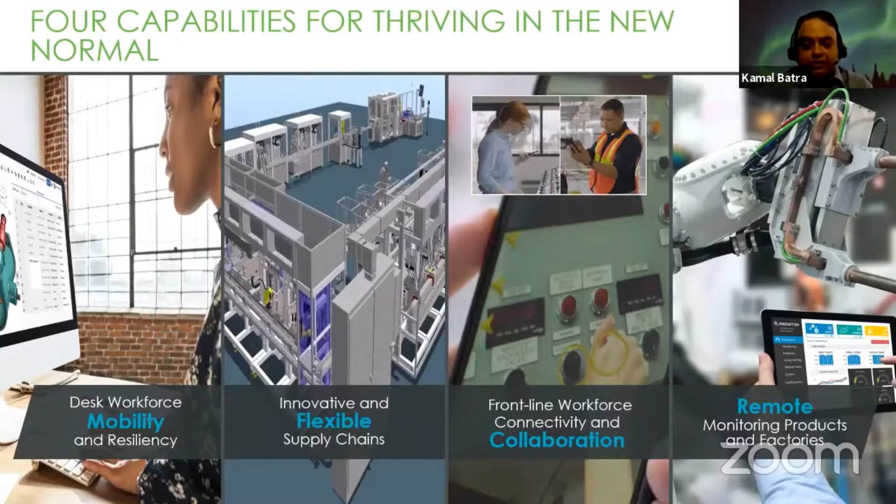Time to transform is now. So what do we need to do? We already have physical infrastructure. Let's bring digital into the picture, merge them like yin and yang, and make sure we get digital transformation, which is the means by which industrial companies capitalize on physical digital convergence. They already have physical infrastructure in place. They need to put the right digital infrastructure in place, and no one is positioned better than academic institutions right now to recommend to industry, to train the students, build that talent so that industries can adopt the right technologies at the right time, at the right pace, and still maintain their business continuity. That's very essential in the given new normal, I would say.

So how will that happen? Physical digital convergence will happen on people, products, processes, and places. How?

On the people front, increased workforce mobility and collaboration. On products, products will always be differentiated on whether they can be remotely optimized and managed. A product will be looked at as an asset, and any equipment should be able to be monitored or managed remotely as well.

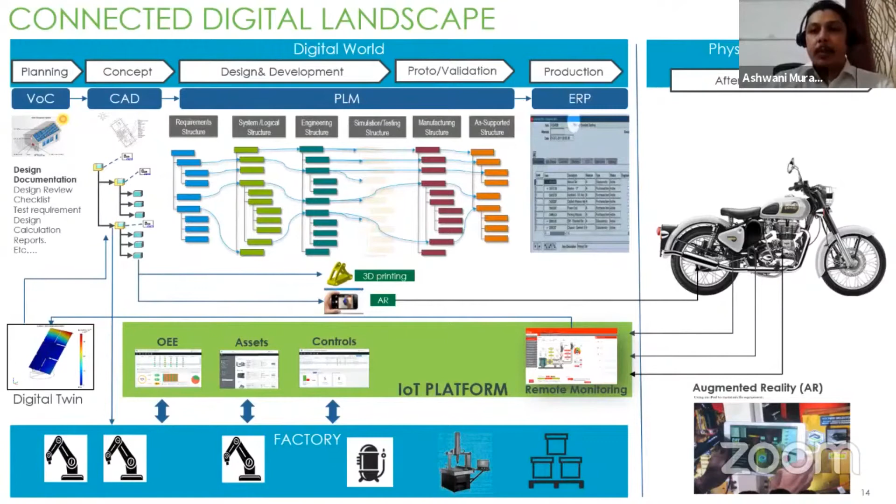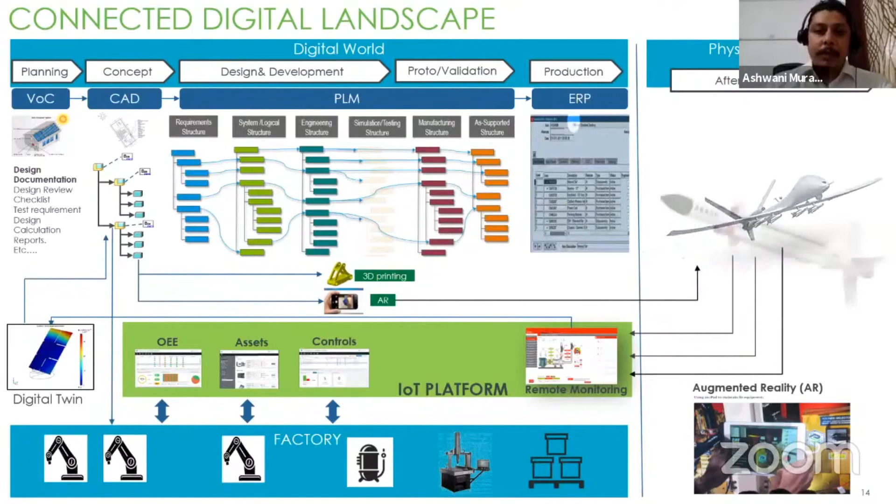We also have digital twin, where, let's say, our vehicle is moving or our machine is working in the lab, and at any point we can see how the parts are moving in our software interface as well. On the right side is the physical world - it can be two-wheeler, four-wheeler industry, aerospace industry, or shipyard industry. The processes across all industries or segments are the same, the industry can change, but that's how it works.

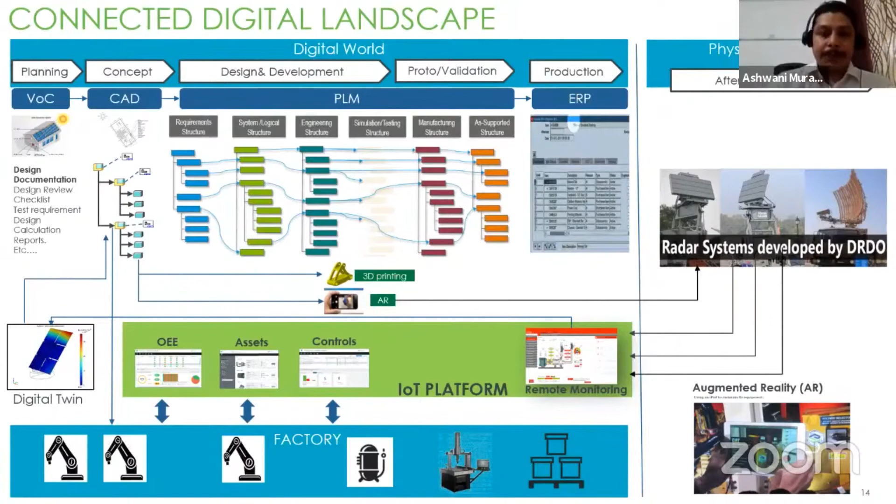I wanted to take you through this so I can explain how PTC solutions are present at various levels. So let me take you to our IoT-based product development system. We start with design engineering, working as low as the concept level, concept designing. We do freeform designing, reverse engineering, and engineering calculations. Same way we work on 3D modeling.

Then at the engineering level, we do simulation - structural, thermal, but now in collaboration with ANSYS, we have CFD analysis also in Creo 7.0. I'll talk about that in a bit more detail in the next couple of slides. Then we can do prototyping as well, additive manufacturing or 3D printing - that includes your design and engineering.

Once your design is ready, we go to the manufacturing level, where we work on tooling design - what tools are required to build that job - or industry automation. We work with modular manufacturing controls, and the quality of the design which will be prepared or manufactured in the plant. Once the product is designed and manufactured, then comes the service part.

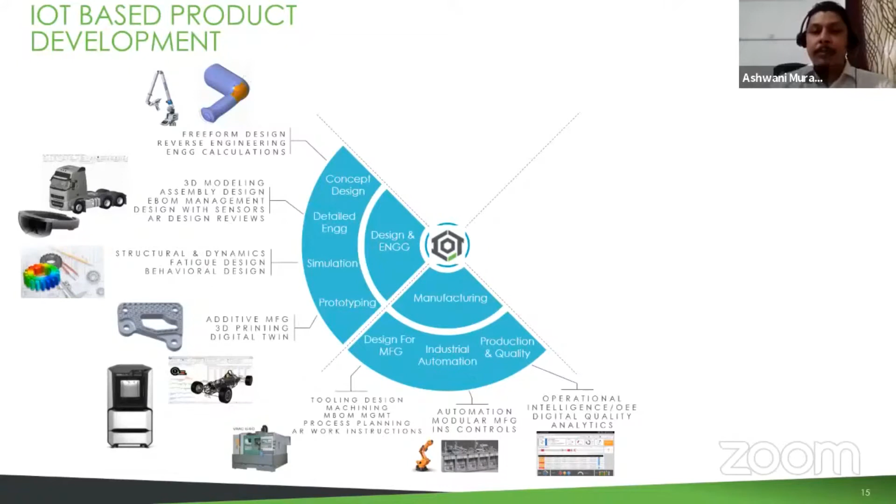PTC has service solutions for supply chain management and service lifecycle management. We take control of how a part is behaving, how it's working. So we have solutions which monitor the design of the product, how the product is working, and how plant maintenance will be done.

Once past services, then we have our IoT solutions. We have collaboration with Microsoft Azure. We have solutions with...

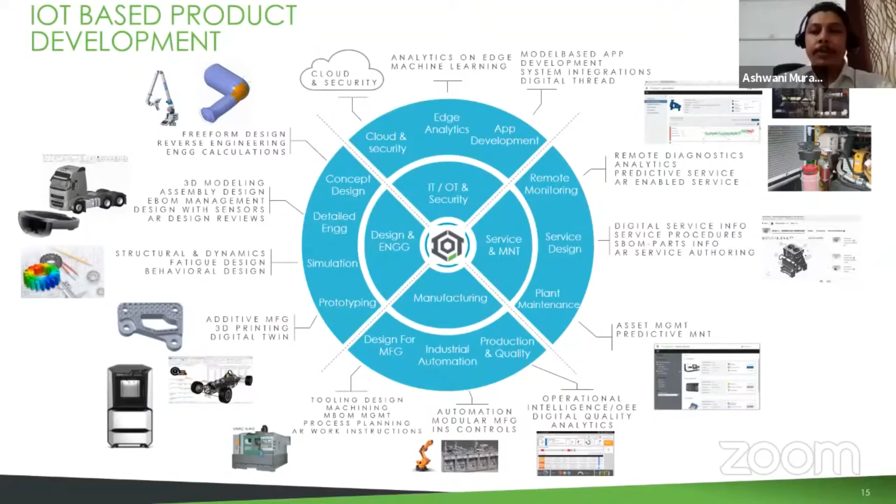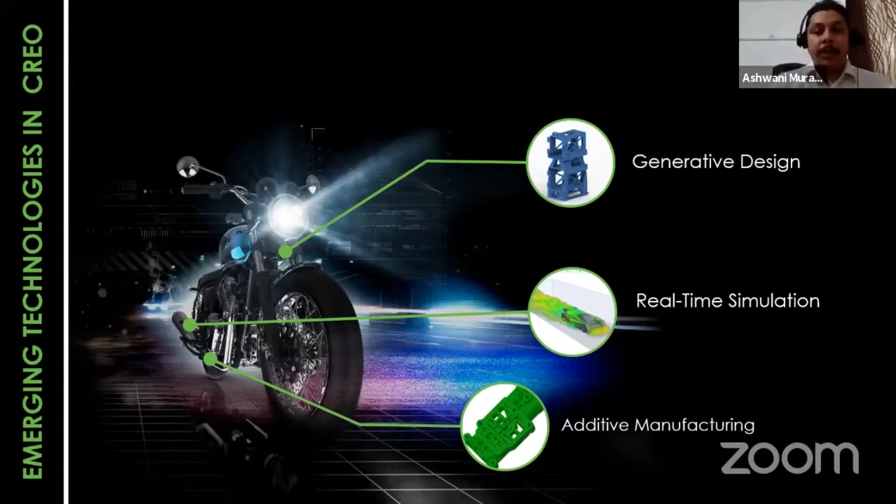Let me take you a little bit more in detail. In Creo 7.0, these are the three technologies we have implemented: generative design, real-time simulation, and additive manufacturing. Let me show you a short video on each, starting with generative design.

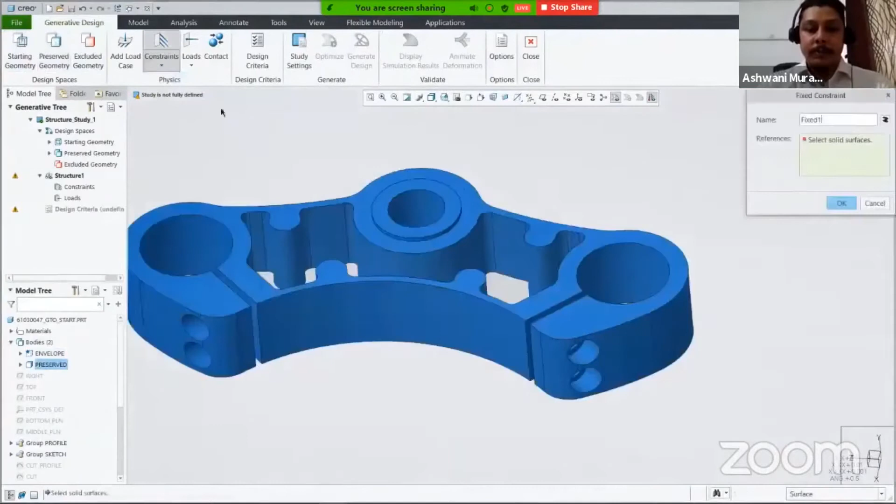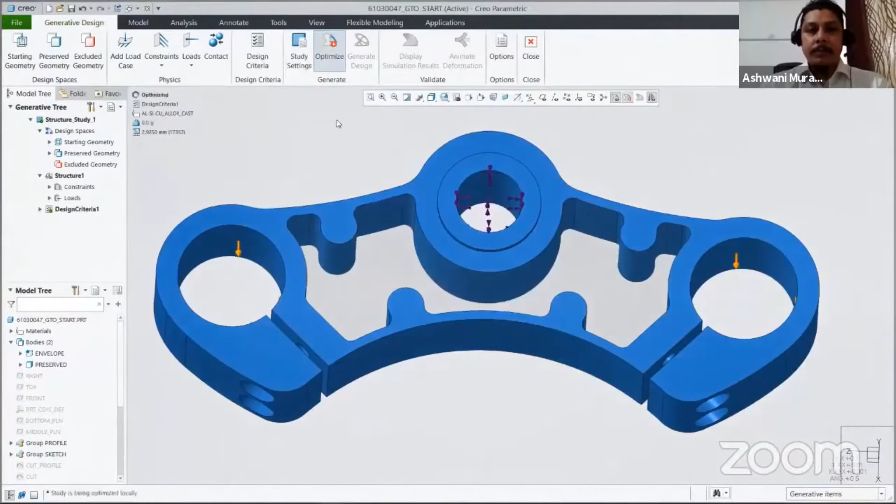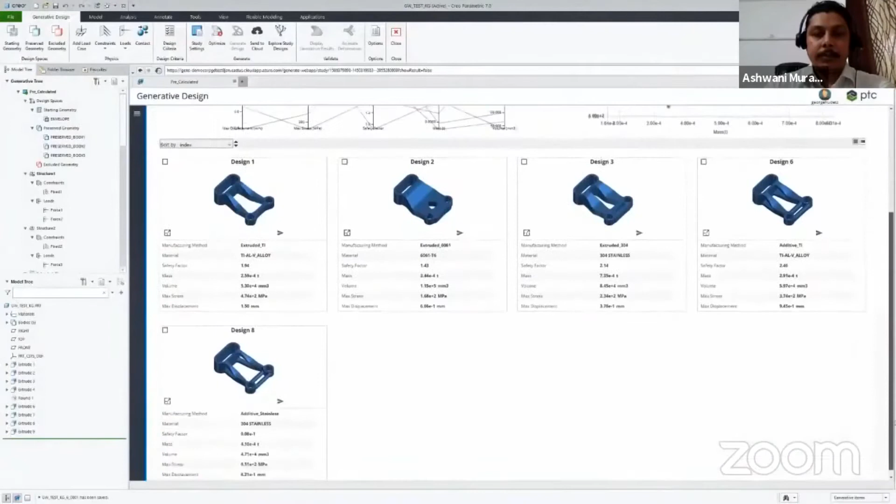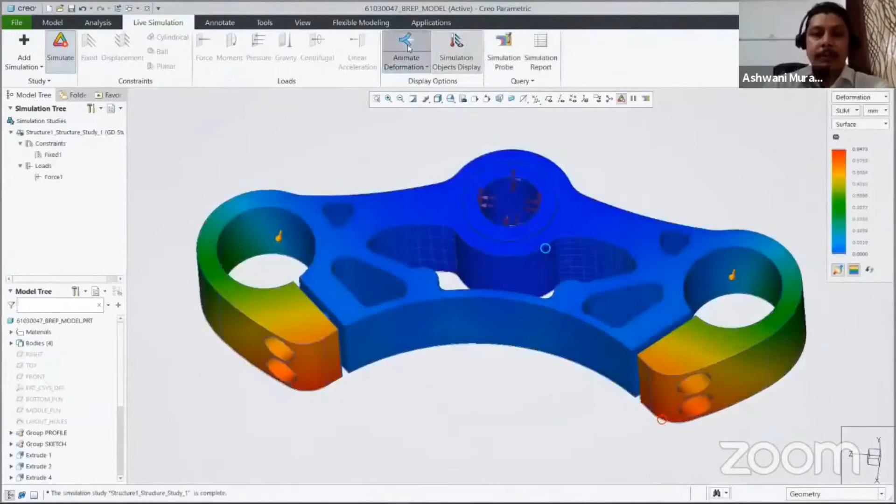Product design is changing, so should your CAD software. Introducing Creo 7.0, the most innovative and powerful 3D CAD software on the market today. Creo 7.0 introduces AI-driven generative design, helping you deliver your best designs in less time. Simply specify your engineering requirements, and the generative engine automatically produces manufacturable designs. Unlike other CAD systems, the generative design capabilities in Creo 7.0 support parametric changes, allowing for seamless iterative design development. Both additive and traditional manufacturing approaches can be effortlessly applied. The Generative Topology Optimization extension helps you deliver innovative products, replacing ineffective carryover features with breakthrough designs. Just set your design loads, constraints, material, and manufacturing method, and the software quickly optimizes your design for weight, safety factor, displacement, or temperature. The result is full B-rep geometry that can be further analyzed and manipulated within the Creo design environment, and you can easily adjust your constraints and requirements to explore other options. Creo's cloud-based generative design extension takes the process a step further, using the power of the cloud to evaluate multiple design scenarios simultaneously. Of the numerous possible outcomes, the generative design extension automatically identifies the top options, including those you may not have considered, so you can quickly evaluate and select your best design solution. Sharpen your competitive edge with Creo Generative Design and enjoy improved performance, innovation, and time to market. With Creo 7.0, everyone can reap the benefits of generative design. Product design is changing, so should your CAD software. Creo 7.0, the future of how you design.

We have collaboration with ANSYS, as Kamal mentioned, and we have implemented fluid simulation in Creo, and it's quite powerful. While you are designing, you can do this analysis side by side.

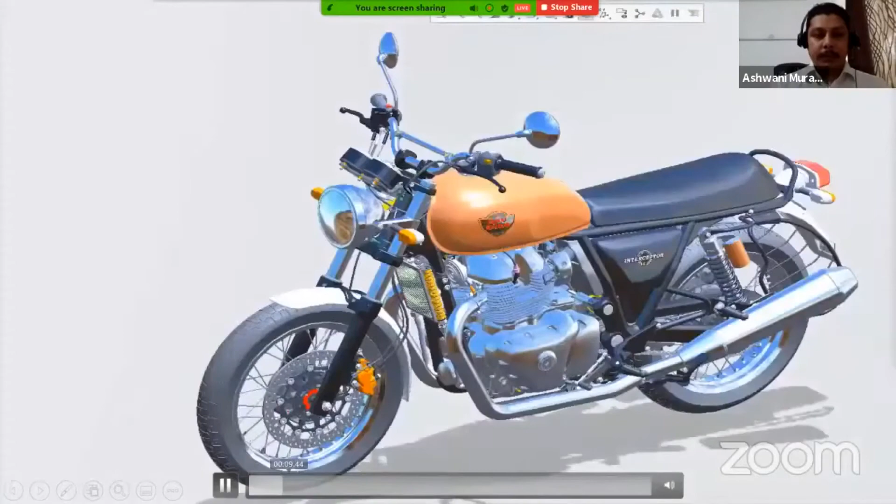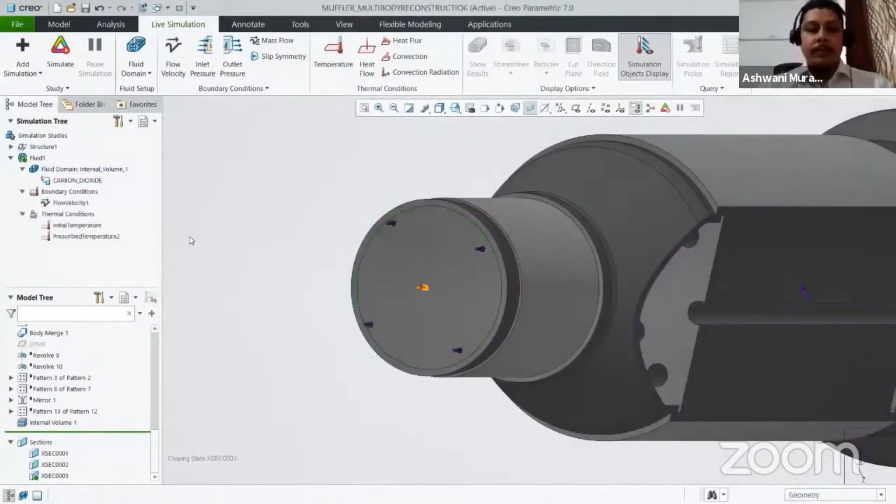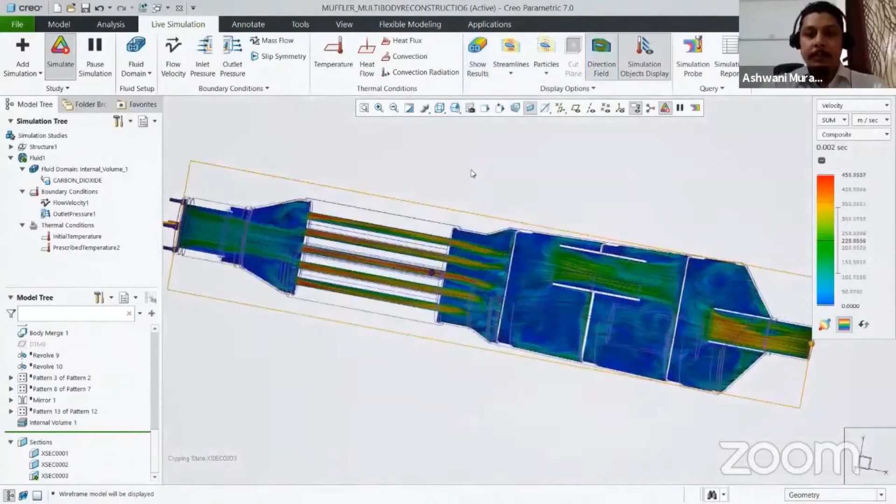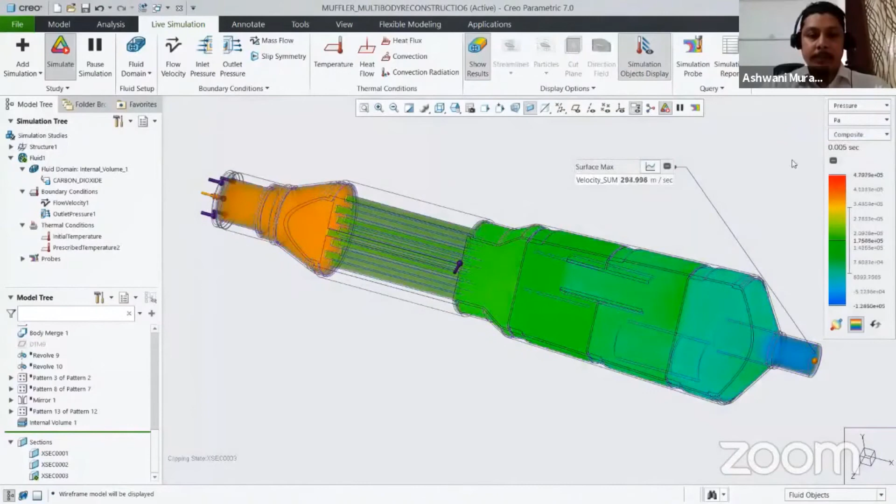Product design is changing, so should your CAD software. Introducing Creo 7.0, the most innovative and powerful 3D CAD software on the market today. Creo Simulation Live introduced groundbreaking real-time simulation capabilities for thermal, structural, and modal analysis. Now in Creo 7.0, we've added fluid flow simulation. Directly integrated within the Creo environment, Creo Simulation Live will now give you instantaneous fluid flow analysis without the need to be a CFD expert. As you make changes to your geometry, analysis results update dynamically. Creo Simulation Live's fluid flow analysis capabilities are fast, intuitive, and powerful, helping you design better products faster. Creo 7.0 includes new capabilities and productivity improvements to Creo Simulation Live. You now have support for thin wall parts and transient thermal studies, giving more insight into real-world performance of your product. Improvements in plotting and graphing make analysis results easier to interpret, and workflow and UI enhancements will make you more productive than ever before. Creo Simulation Live is the analysis tool of choice for design engineers, and these improvements make it more efficient, powerful, and easy to use. Product design is changing, so should your CAD software. Creo 7.0, the future of how you design.

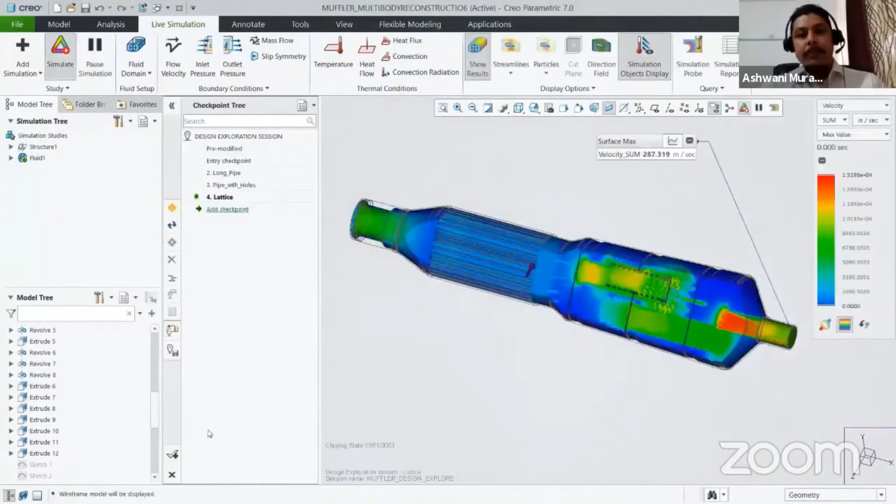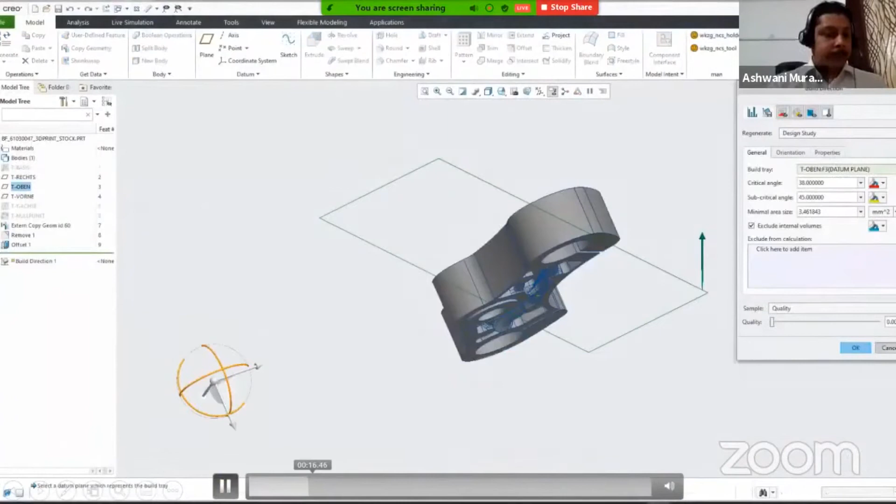And the additive manufacturing. Product design is changing, so should your CAD software. Introducing Creo 7.0, the most innovative and powerful CAD software on the market today. Additive manufacturing is changing the way products are designed and produced. Creo already offers the most comprehensive suite of additive manufacturing capabilities in the market today, and Creo 7.0 continues this innovation.

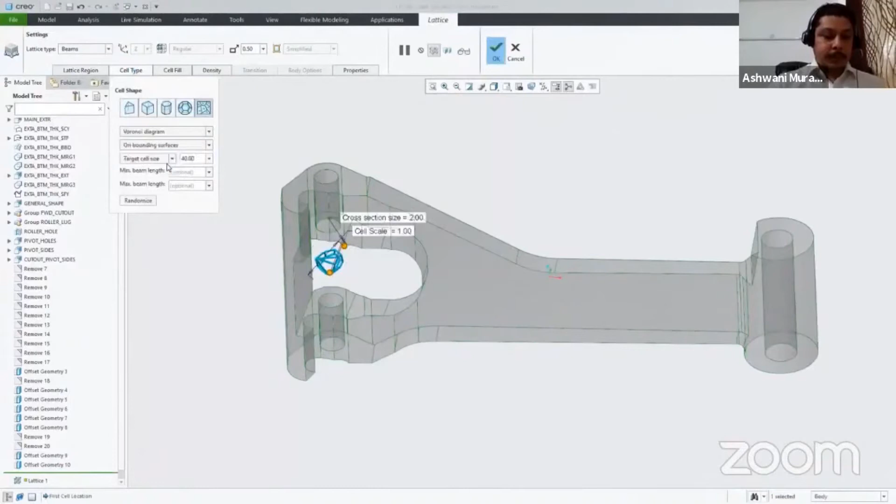Stochastic lattices are useful for producing medical devices and products which require heat transfer applications or shock absorption. In Creo 7.0, you can now create stochastic lattices that follow hard edges and develop them with triangular mesh structures using the Delaunay algorithm. Lastly, custom cell improvements give you the flexibility to create lattice structures based on non-BREP geometry to better serve your needs.

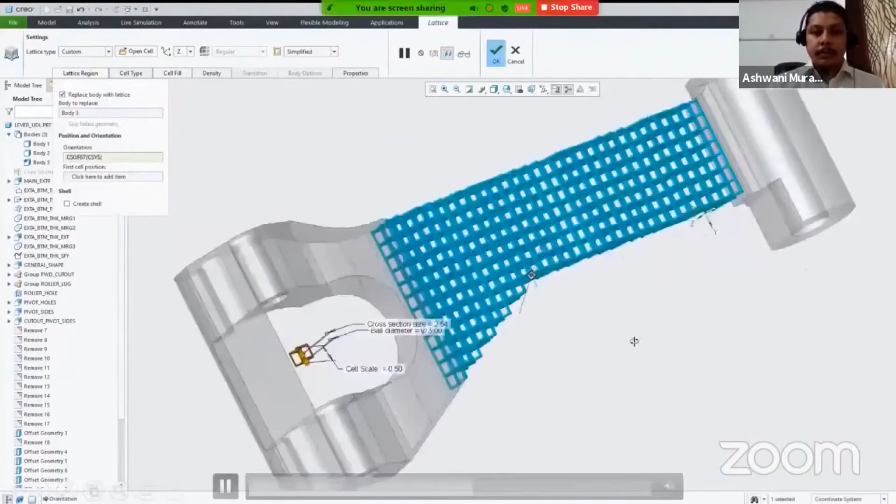Creo 7.0 also features significant enhancements for traditional or subtractive computer-aided manufacturing processes, starting with support for Swiss-type turning machines in Creo's NC suite. This is especially useful for a broad range of high-throughput production operations.

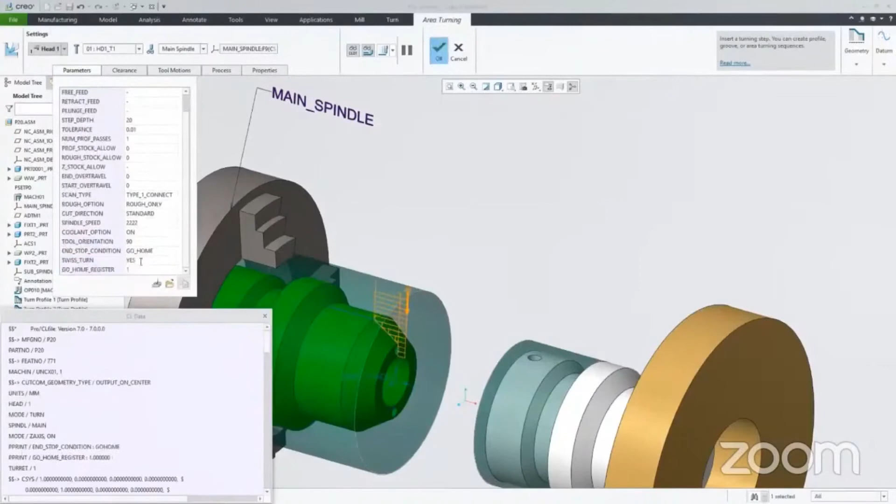Creo 7.0 also features several productivity and UI improvements, including support for multiple go-home positions for advanced machine types, eliminating the need for lengthy custom commands, and synchronized toolpath highlighting, making it easier to visualize sequences in a clear and simple way while you work. Product design is changing, so should your CAD software. Creo 7.0, the future of how you design.

So this was about Creo. So we have the other solution, which is MathCAD. MathCAD is a digital engineering notebook for doing all your engineering calculations and managing your design intent. It's just like a whiteboard. You can write your equation, you can solve it in clicks, and it is very useful in the industry.

It's very efficient, and for example, I would like to mention that NASA does all their calculations on MathCAD. In one of their projects earlier, they had some minor mistakes in the Excel calculation, and now they have shifted to MathCAD for more accuracy and efficiency in the system.

We have Windchill. Windchill is our product lifecycle management software. When we are designing anything, when we are developing any product, it goes through different processes. It starts with plan, then we have some concepts where we do sketches or some CAD layouts, then it goes to design where we work on 3D models, or do some simulation, some calculation. We create the engineering bill of material.

Some part design teams might send back the design to concept level for doing some changes. Similarly, once it is done, then it goes for validation. They'll create some prototype, test the results, and after that go to production, where they'll also work on the different tooling required to manufacture that part, and finally support. So starting from plan to production, it goes to various levels, and there are a lot of changes from different departments.

So Windchill takes care of the complete product design system. It manages the BOM management and the design management.

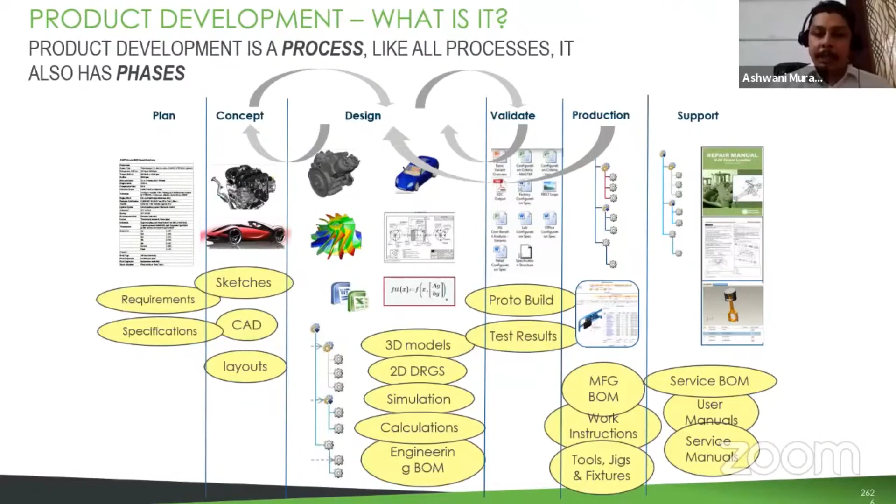Just one more point on what more we can do with Windchill. It manages multi-CAD data management, whether it is the documentation part or model based communication. Similarly, for process management, you can do your manufacturing, where it ensures repeatability and scale, MBOM, process planning, and work instructions. So that's how, starting from CAD management to bill of material to different supplier management, and in a product there are different parts also, it manages the parts classification as well. That's how industries are getting benefited with the PTC Windchill solution.

Just a small video on it, for a better understanding.

With that, let me take you to our next solution for Internet of Things, which is PTC ThingWorx software. Today there is no question that industrial IoT is rapidly transforming business. In a recent IDG research study published this spring, over 72% of companies interviewed acknowledged that a digital business model is critical for success. A digital business model is a model of the business that reflects some level of digital transformation through substantially improved analytics, much more extensive use of business intelligence, or implementation of IoT.

Within industrial IoT, the number one use case, over 79% of respondents to a recent IoT analytics survey mentioned, is predictive machine maintenance. Today, machine downtime is both expensive and disruptive to manufacturing processes. Machines never break the way you plan for them, so it causes expensive firefighting. Parts on hand are not the right parts, and multiple trips are required to repair these issues. Many organizations see this application as a way to score a quick win with IoT. It saves a lot of time and money, and it increases yield.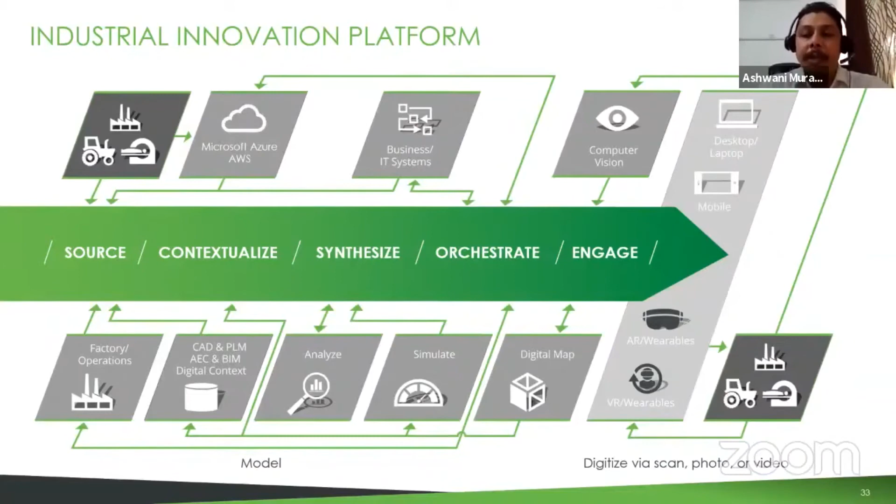When we say engage, it engages people to better perform and make decisions — clearly presenting relevant, compelling information on desktop, or as web and mobile applications. This is a cutting edge augmented reality experience. Different people at different levels want to see the problem in a different way. If it's relative to a department, the head of the department would like a more detailed view of the problem, whereas a CEO would like a more aerial view of the plant or the factory.

So tomorrow, if students are working on or learning these technologies and go out into the market, all these segments — whether energy, smart cities, consumer goods, connected homes, retail, oil and gas — everywhere these technologies are changing their processes. When students go out into the industry tomorrow, they'll understand that the technology they learned today, they'll find the same technology in the industry, and it will be very useful for them.

So with that, I'd like to show you a small video on how industries are using PTC ThingWorx solutions and managing their operations.

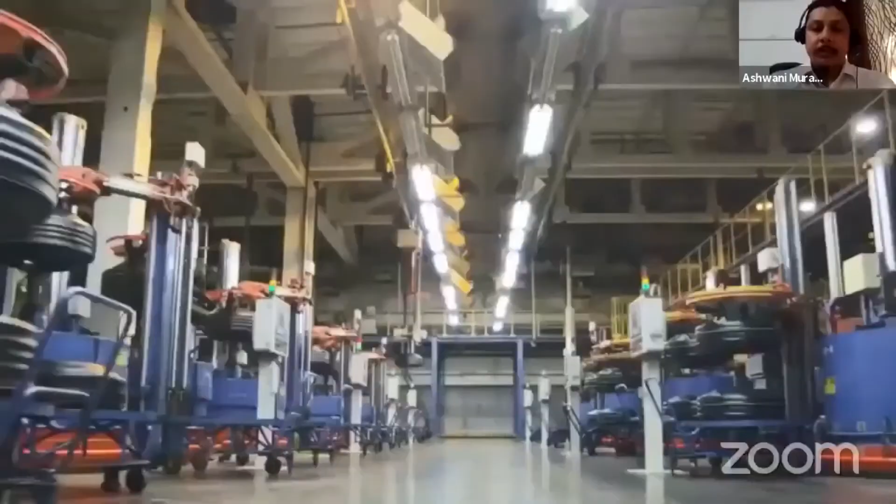IoT-driven innovation empowers industrial enterprise to solve the new, complex challenges of a changing global marketplace. Executed well, the right solution can turn the promise of industrial IoT into a powerful reality. No matter what stage of the IoT journey, there are opportunities and questions.

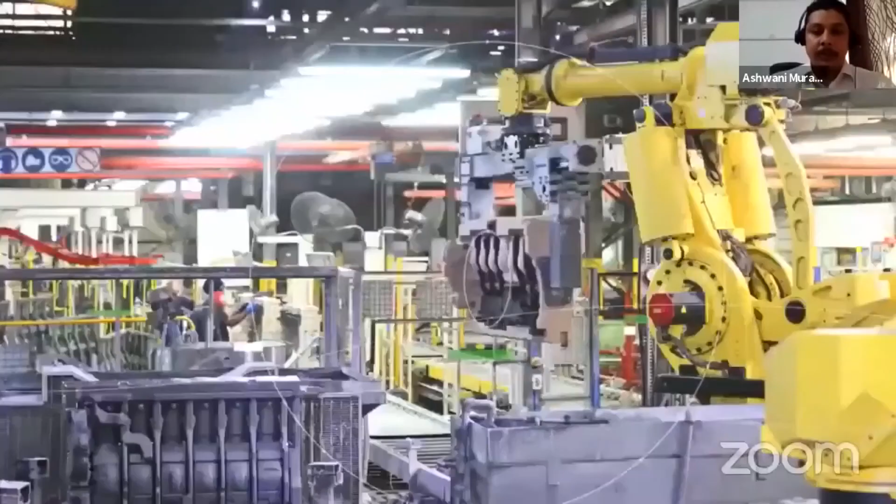How do you jumpstart that innovation engine? Establish connected operations that yield high return. Extract data insights for users at every touch point. And how do you optimize these IoT-enabled insights to gain competitive advantage?

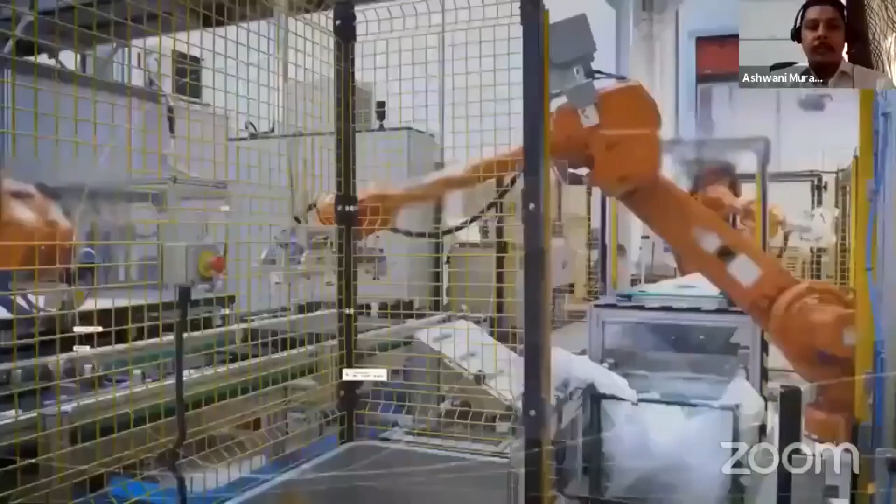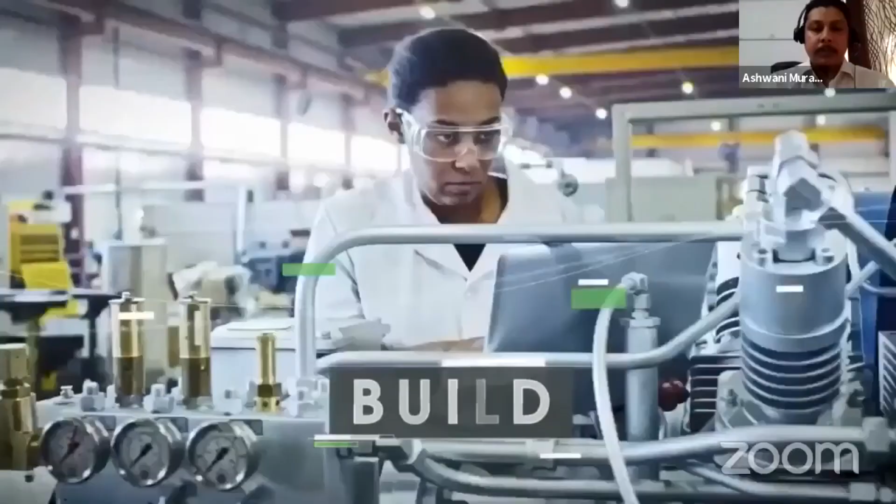PTC's ThingWorx brings together the functionality, flexibility, and scalability you need to meet the pace and demands of the ever-changing digital world. ThingWorx securely connects thousands of devices, from small-scale edge deployments to advanced enterprise-scale ones, all with a single source of versatile data. Its easy-to-use interface helps users at all levels build and access custom IoT solutions that not only solve lingering inefficiencies, but drive a new generation of innovation.

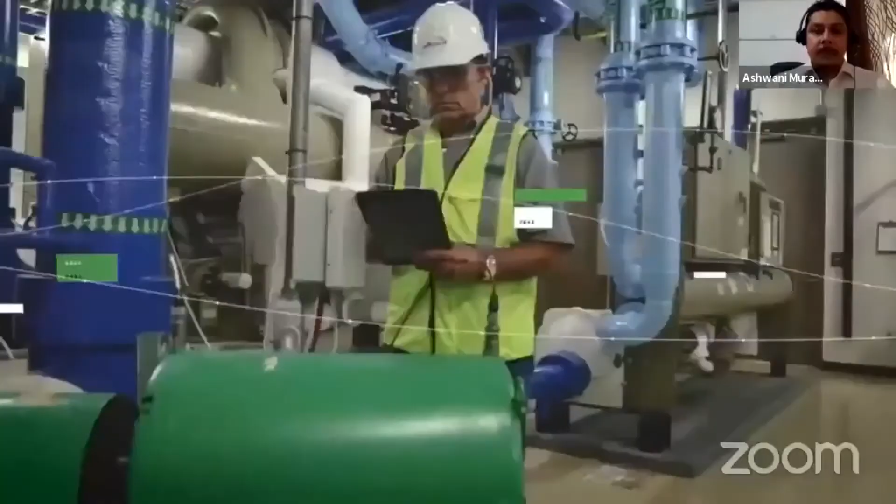ThingWorx helps you effectively and efficiently manage the volume of data IoT captures, producing valuable insights and analytics about your products, from predictive maintenance to real-time alerts and course corrections. ThingWorx relies on elegant and adaptable UI, custom dashboards, and cutting-edge augmented reality to ensure your information connects with the right person in the right format at the right time.

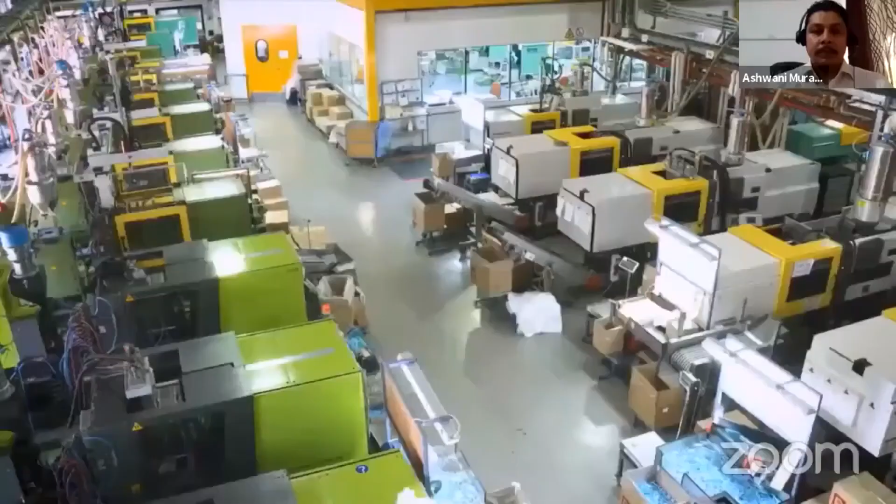Recognized by experts for its ability to drive industrial innovation, ThingWorx is revolutionizing the way companies solve the complex challenges of today as they build for tomorrow.

So let me take you to our next technology, augmented reality. With the help of augmented reality, we work on digital twin, we work on the machines, and in the design, the software format as well. With the help of Microsoft HoloLenses, here's how we are doing it. Let me take you through, and before that, what augmented reality is and what other solutions we have.

Let's understand how industries are using and how it is changing, starting from a 2D drawing to being able to visualize the industry, how the machine is working in the industry.

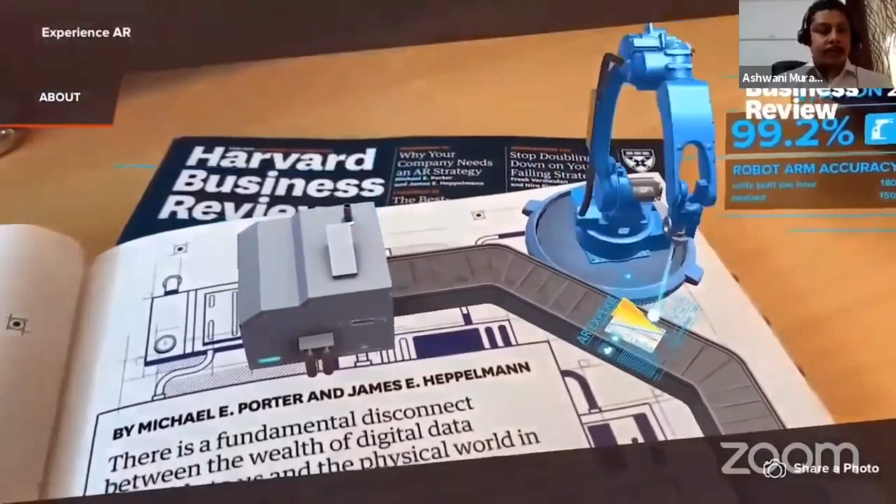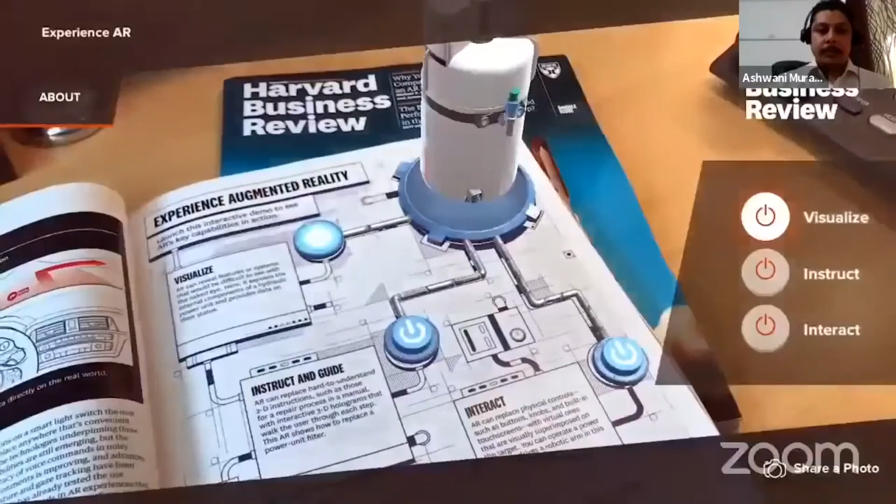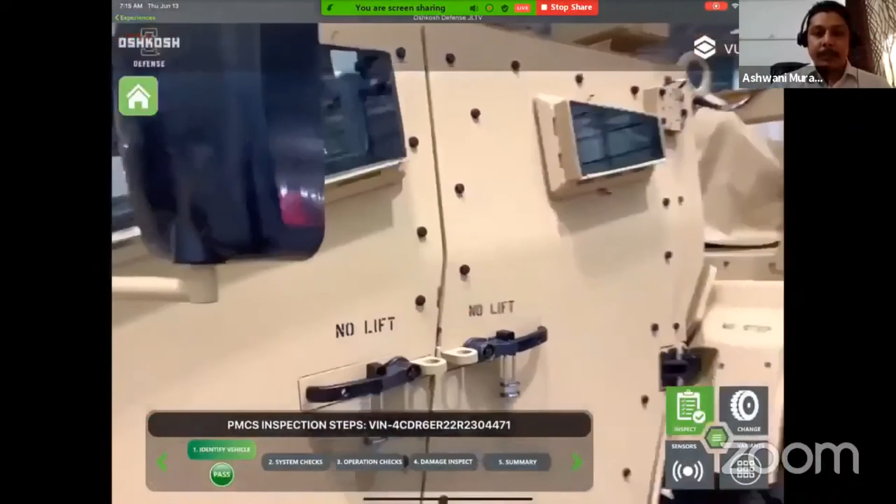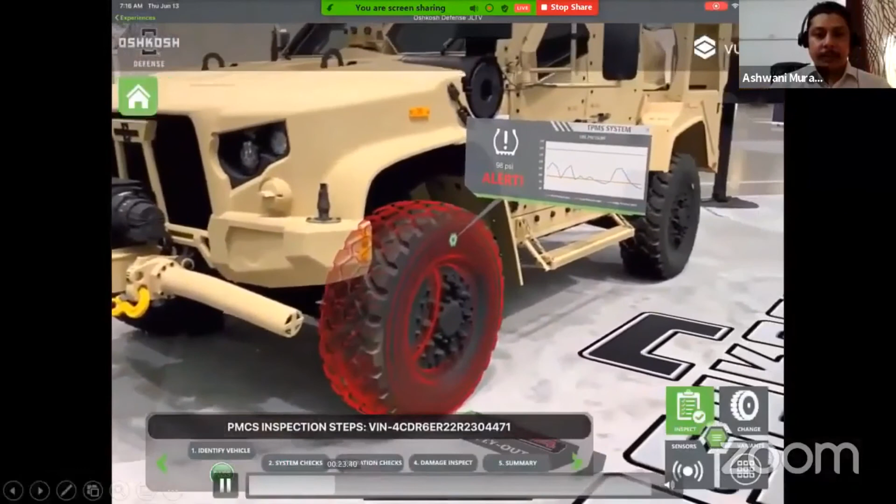In fact, you can do self-service as well when using any machine. It's an example of a vehicle, where maintenance is to be performed. The maintainer will automatically be alerted to any relevant warnings and cautions as they perform the routine inspection. In this example, the maintainer is being alerted to the fact that the tyre pressure monitoring system has detected low pressure in the vehicle's tyre.

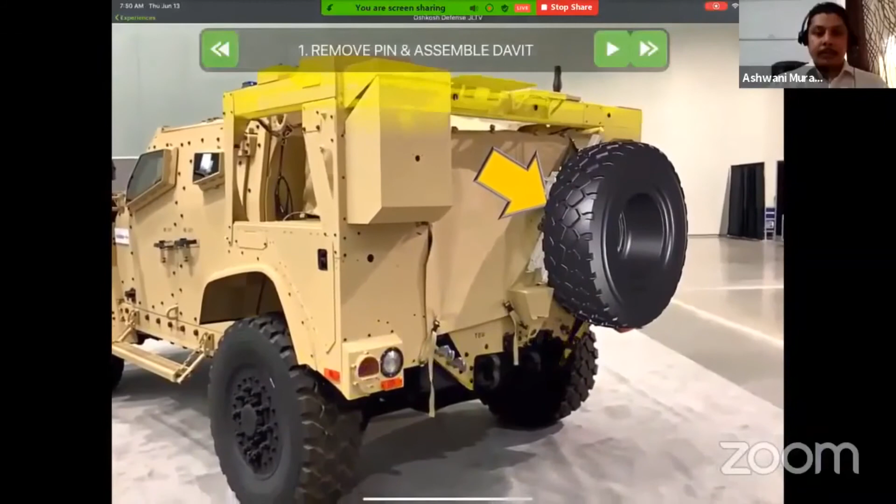In order to rectify that problem, the maintainer will now be directed to the relevant maintenance procedure to replace the tyre on this vehicle. On a special mission vehicle or a tactical vehicle, something as relatively simple as changing a tyre can actually be quite a complex procedure that involves multiple pieces of support equipment and the lifting of heavy objects. So there is a safety element to doing this procedure correctly.

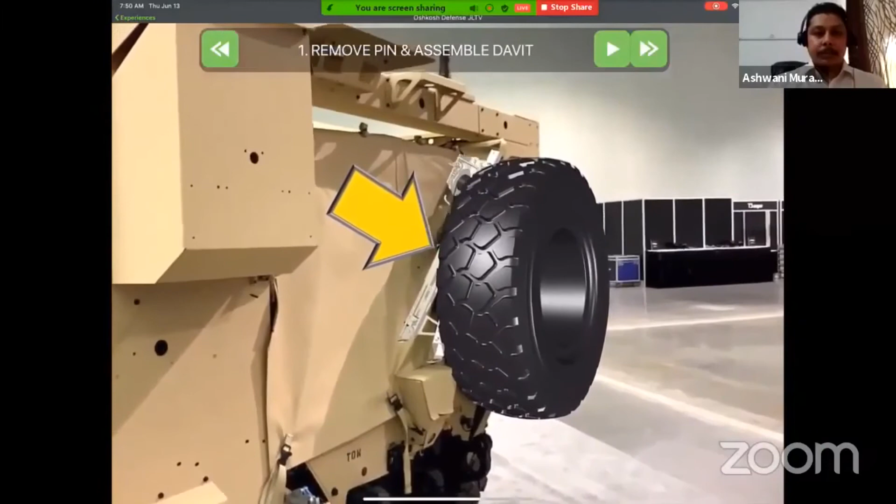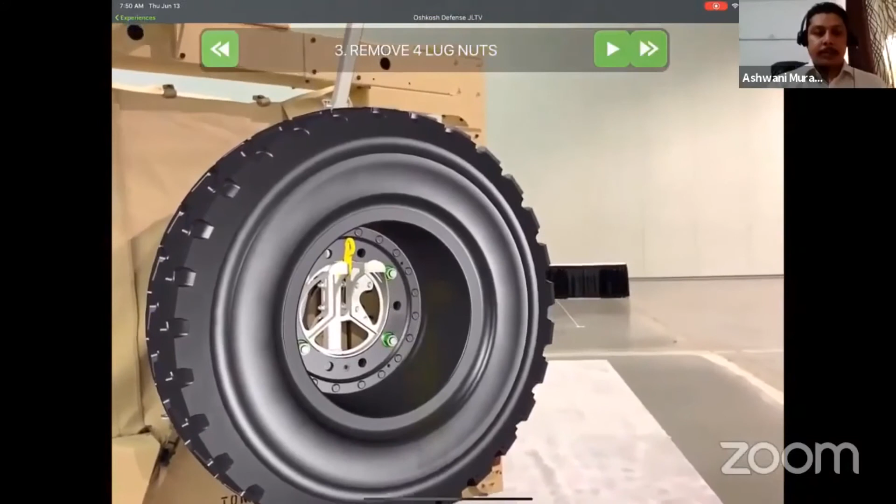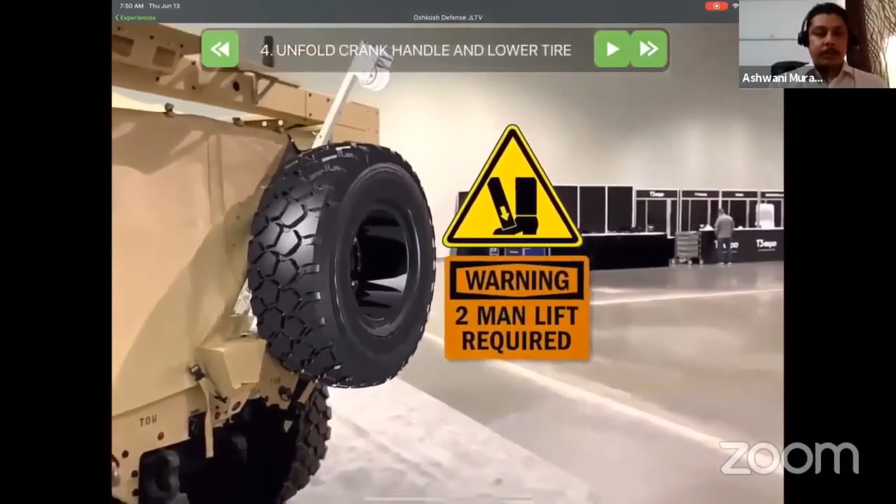In this example, the maintainer is directed how to use the winch, where to affix it to the tyre, and the correct way to attach, lift, and remove the tyre from the vehicle. Also, the use of any additional tools such as wrenches or drills can be factored into the augmentation to ensure that the maintainer is using the correct tool for the job.

This type of task-based augmentation can be used when needed as a job performance aid, or can be used as just-in-time training before a mechanic or operator attempts this procedure. This will ensure that the procedure is done correctly.

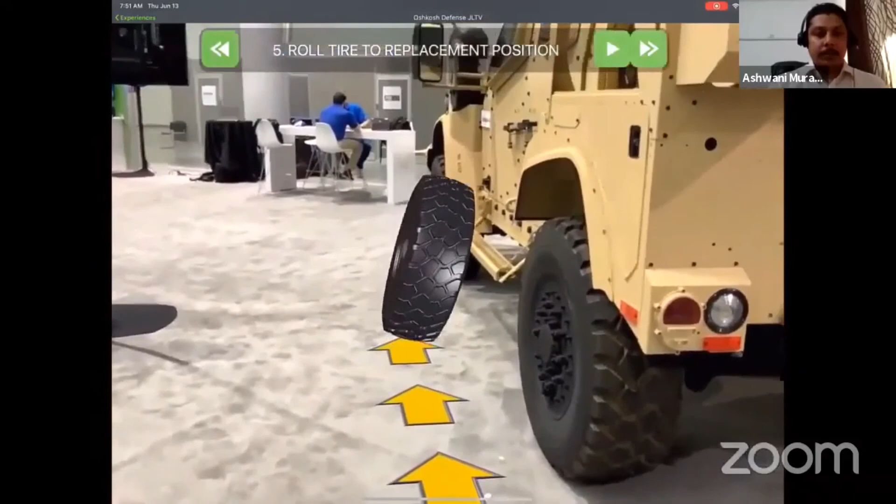We have very little time, so let me explain it this way. We won't have much time to show you videos, but if you have any questions, we'd love to take them. So we have four different solutions, starting with Vuforia Studio, as you have already seen.

You can visualize the machine and how it will work. With expert capture, when a new employee is joining, the industry can record a session showing how this machine will operate. Let's say they need to build an engine.

With the help of HoloLens, it will guide you on what the next step will be. You need to open these buttons or these nuts and bolts. You need to place the next part like this. So it will guide you step by step in Vuforia Expert Capture.

In Vuforia Chalk, you can do remote assistance. Let's say you are sitting in Dubai, we are sitting in India, and there are some challenges that your industry or machine is facing.

When you scan the barcode on that machine, we can take remote control from you and guide you from here, like go to this side and press this button to check whether this part is working or not. So customer support is much faster now, and we can reach out to the customer at a very early stage. Otherwise, we'd need to apply for a visa or have a person visit you, which might take 2-3 days.

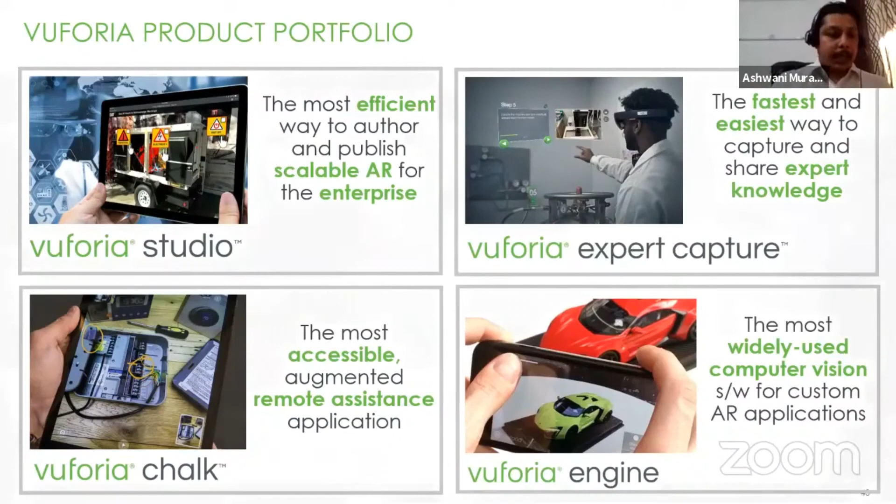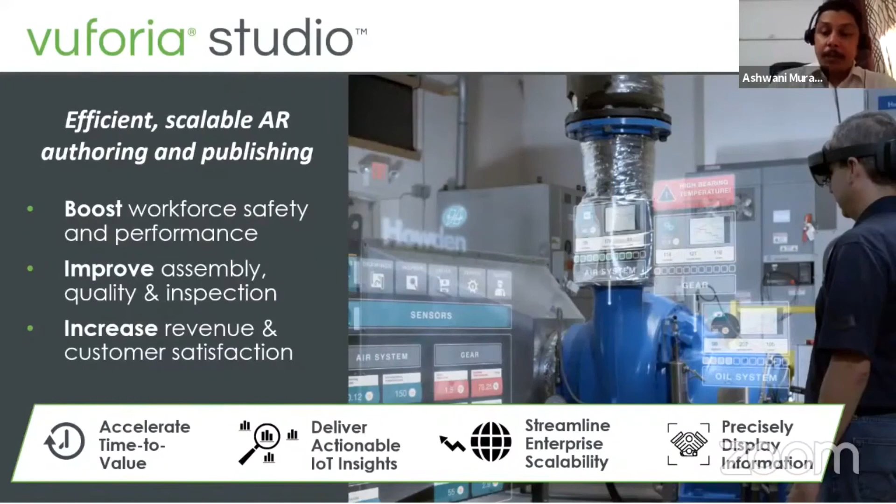This is about Vuforia Studio. We can work with the help of HoloLenses. It improves quality inspection and assembly, and customer satisfaction is much higher. I'll skip the video and touch upon the next part.

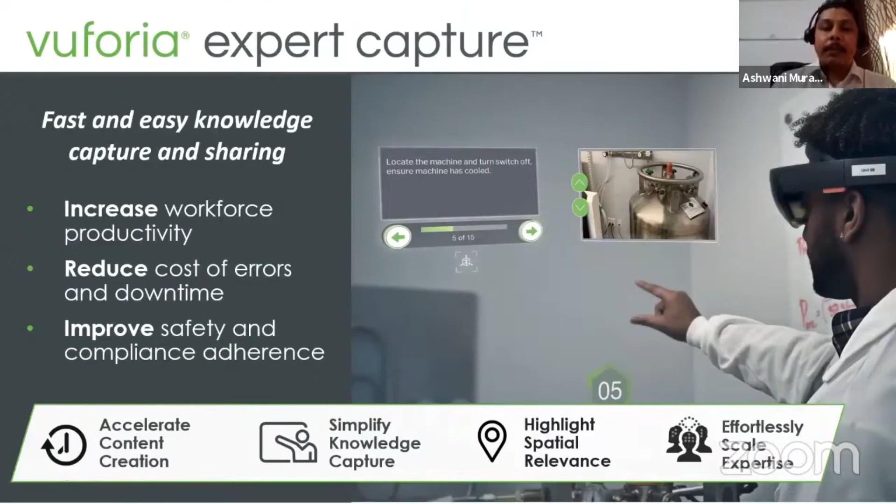So this is expert capture. This is how you capture with the help of HoloLens 1. In HoloLens 2, you can select the part or assembly with a blink of your eye. I'm skipping the video. Vuforia Engine increases brand value and differentiation.

The inventory control the industry needs to manage is much less with the help of this solution, and it's very effective for the industry.

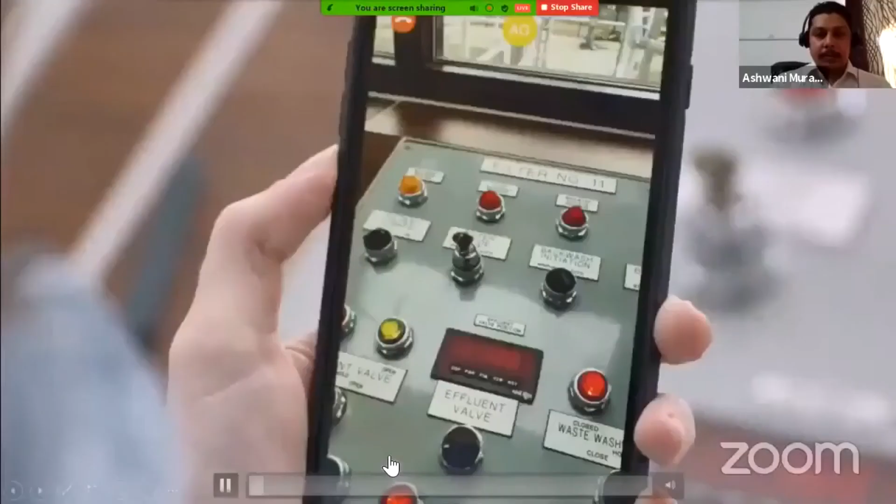Let me take you to Vuforia Chalk, again the remote assistance. Connect for support or training. First, employees can share a live view of their workspace with an expert or coworker. The waste valve here, now that's closed, you can turn on your surface wash valve, which is here.

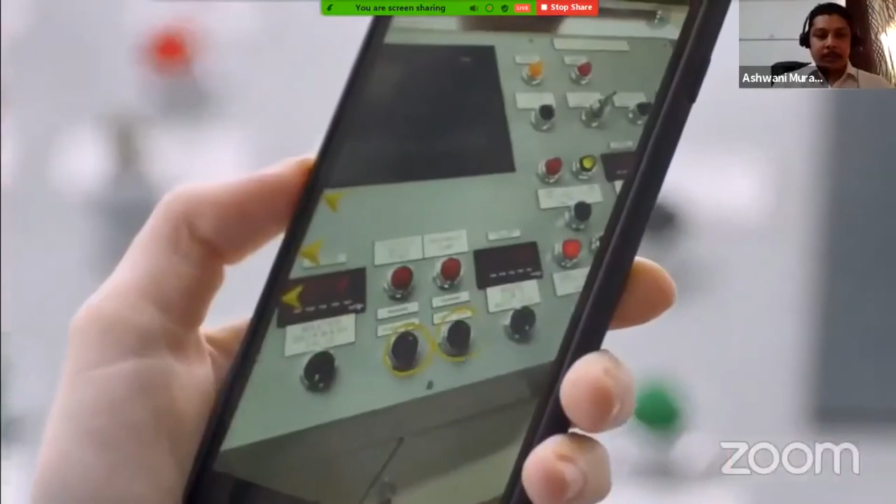Okay, got it. Both people can draw on the world and work together as if they are together. Thanks to Vuforia augmented reality technology, simple instructions help you solve complex problems the first time, reducing equipment downtime and improving your bottom line.

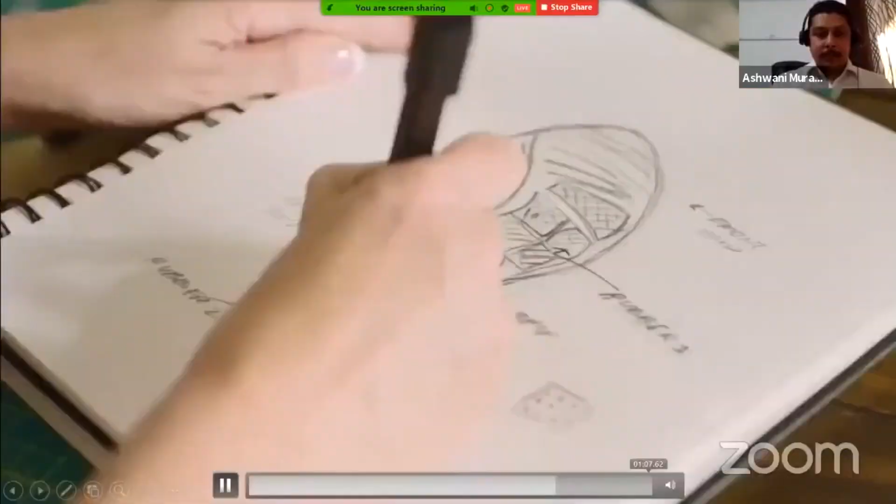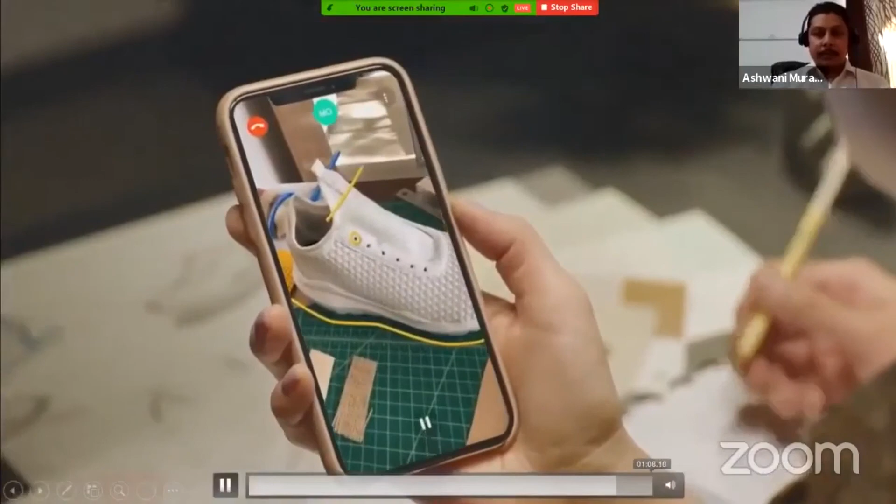Chalk is ideal for service and training, and for other forms of collaboration too. Okay, lower the tongue, and let's lose this eyelet. It's easy for your team to work together or give feedback from almost anywhere in the world, saving you time and money. So that was about AR solutions.

Onshape is our latest acquisition. We acquired this company last year, and this is the first solution which is completely cloud-based. It was available in the market long back. The first version of Onshape is a CAD solution. You can do your design, your part or assembly, and it has many features that other CAD solutions lack.

You don't need to install anything, everything is on the cloud. Today, as we announced at the start of our session, we'll be offering it to a few of the attendees from colleges and universities free of cost, to support the COVID situation and for students' benefit. It supports many things that are quite difficult on other CAD platforms.

You can save the document, you don't work on a file, we call it a document in Onshape. You can import or export it to other CAD platforms as well. There's no crash while designing, because every time you design anything it's automatically getting saved on the cloud. There's no installation required.

You don't need high-end machines or specific hardware configuration, you don't need graphic cards. You can run it on your iPads, on your Chromebooks, or even on your mobiles. It's very useful, and colleges and universities are getting benefited from it. They're running students' CAD classes on it and are very happy about it.